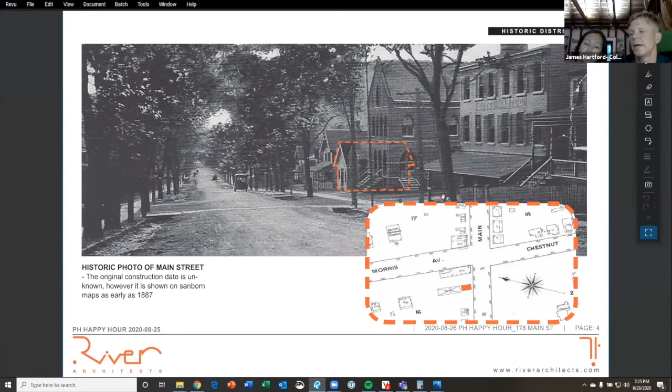So the strategy we had was to kind of classically follow the lines around, making the exterior sheathing layer of the existing building the air tightness layer, over-insulating for that. Then in the basement we'd flip that - the original goal was to retain the original stone walls and then insulate to the inside.

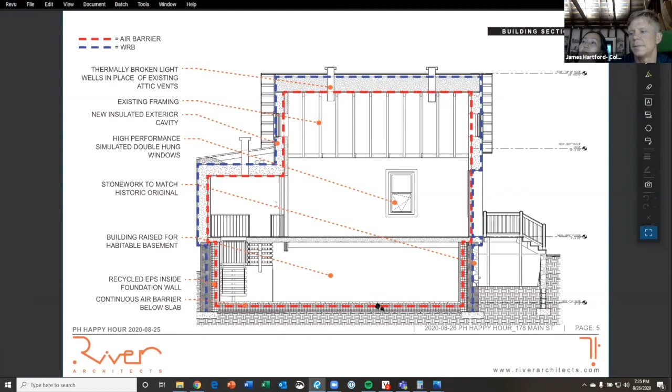So a simple plan - here's the concept that I sketched up one night when I couldn't sleep. The simple idea was to leave the existing stone walls, lift the building up, and extend the stonework up with a thermal break and foam glass so that we can make continuity for thermal and air sealing.

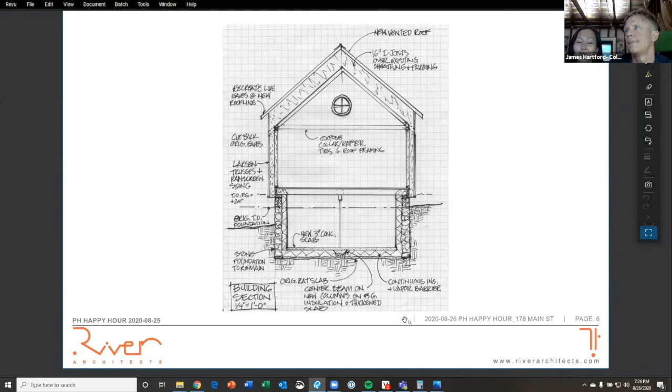In the back of my mind I'm always wondering how that new and old stone wall is going to look, one against another. So here you see the original framing - we chose to expose it for the roof, and the skip sheathing from the old wood cedar shingles that were on it.

Miraculously, this horseshoe shop did not burn down. It just had a big open hearth in the center with a forge, and then had 2 roof vents, which we actually replaced with light tubes.

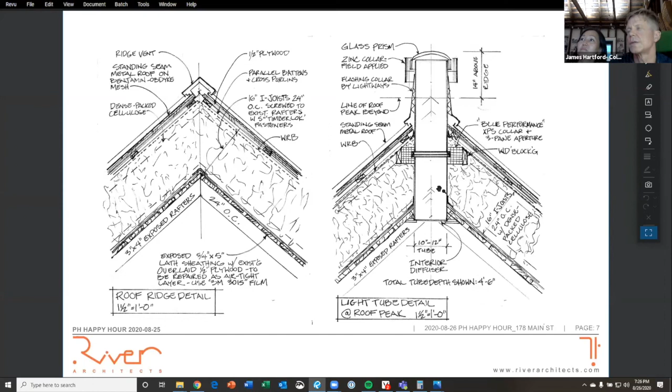So the original sketch is here, trimming off the rafter tails, putting new wall sheathing here, and then wrapping the whole thing with an air tightness layer. Then recreating to the outside those rafter tails and just kind of giving it a puffed up look.

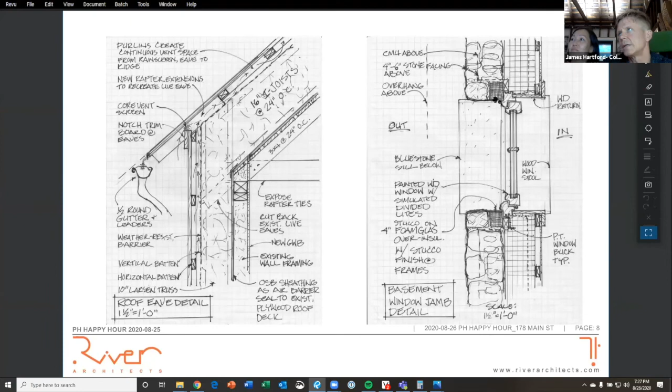We came up with a pretty good window section in the basement plan detail, where we introduced foam glass around the perimeter, so that we were able to get over insulation on the frame, and then did a little stucco wash to make it blend into the stonework. So here it is, extending up the stonework, nice and easy, same idea with the foam glass wrapping all the way around.

But then we realized that the stone foundations had to go. So we stuck with the same plan, but moved the framing out, because the goal was to support the original structure. We moved the plane of the masonry out, bringing the stonework out so that it reduced the amount of overhang there. We created a shelf in the masonry to reclad with reclaimed stone from the original foundation, which is the glacial till throughout the Hudson Valley here.

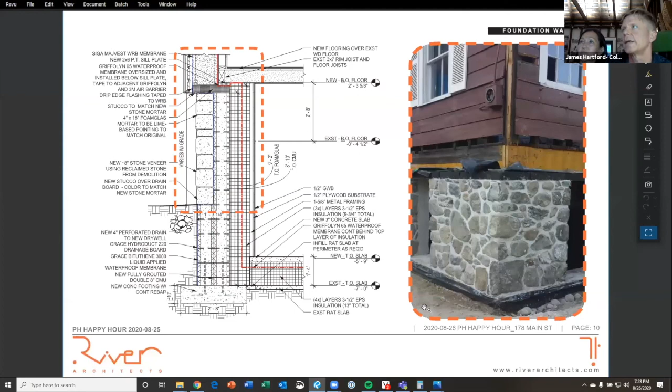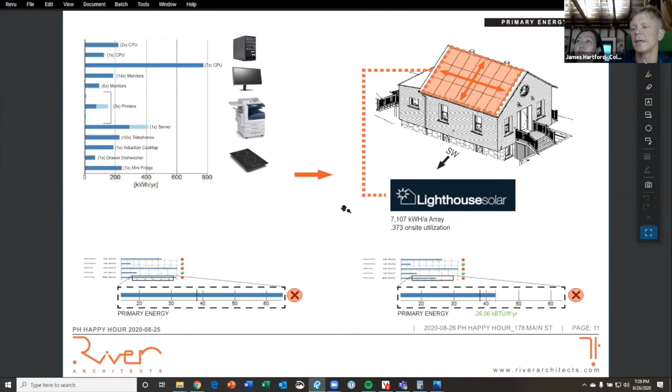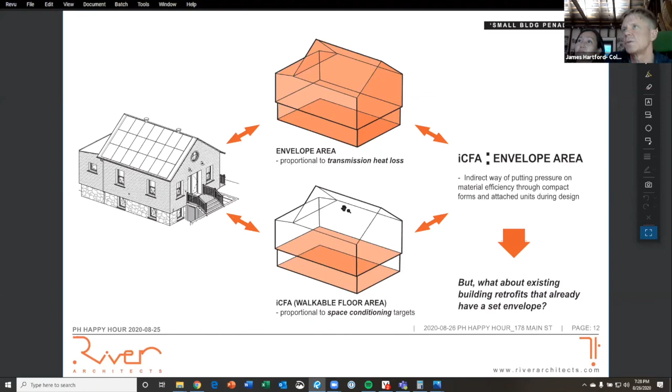So solar - the typical energy loads for an office, even with PV, we weren't able to meet our primary energy demands. It has a lot to do with the small building penalty, which if we added just 300 square feet of loft space, we would have actually been passing.

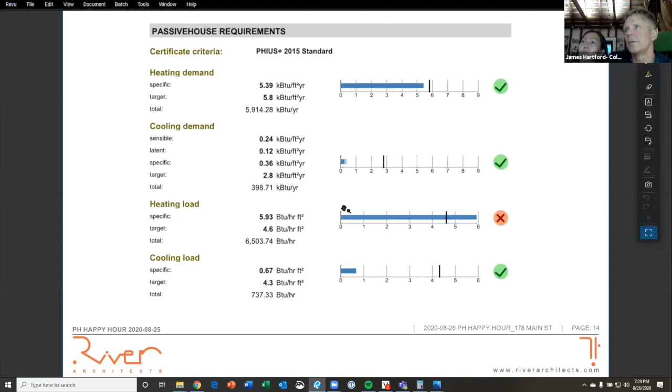We found that the heating loads and cooling loads are actually not very accurate as modeled. We have no problem heating the building. We do require more cooling than the model suggests.

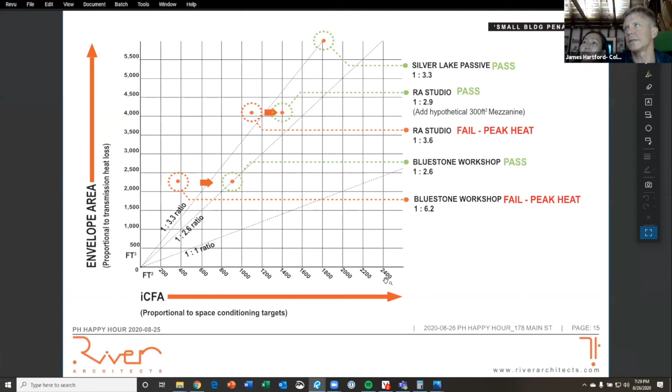And if we were to shift the building, you can see here, if we just added a little bit of square footage, we would be passing. This is just a study of various projects we've done, floor area ratios.

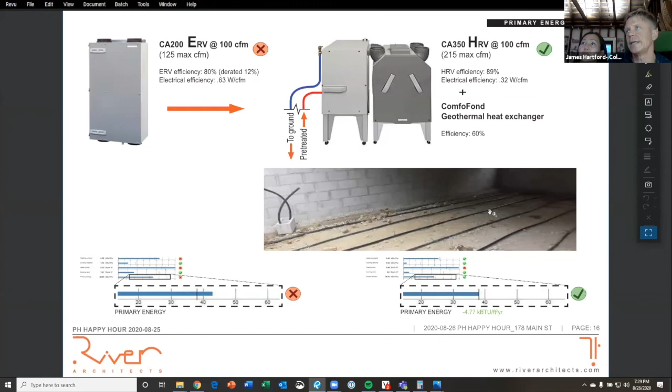Back to the energy modeling, once we added a preconditioning loop in the ComfoFond for the Zehnder, we actually brought it into passing. We basically have ground temperature water in contact with the soil under the insulation of the basement floor, and that gives us all the tempering we need to make our primary energy pass.

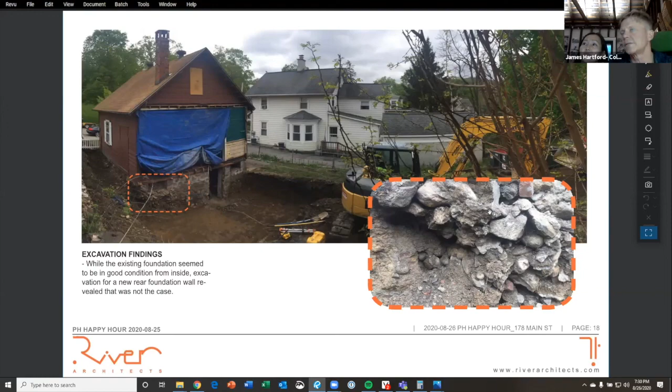And as we dug further, we discovered gasoline from the gas station, so we had subsoil contamination. So we braced the building. Originally, we had a moving company lift the building, and since it was already up in the air, we decided to have them skid it into the backyard.

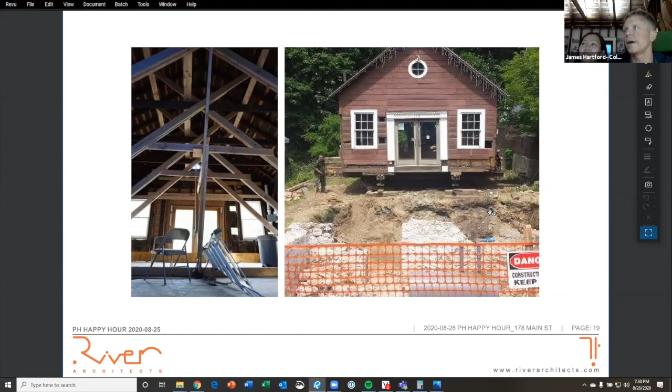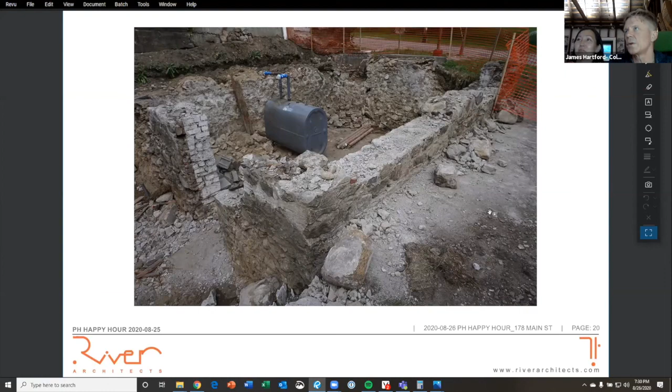And there's our fantastic foundation. And we had that tank, we removed that. But once we removed all this rubble, we were able to gain back quite a lot of space on the interior.

Taking a pause, we were saying the bright side of the thing is, good thing we were already committed to extensive renovation. I said, can you imagine if we were just laymen, just bought the office, renovated the heck out of the interior, and moved in - what would have happened discovering this afterwards and moving out again? We were saying, thank God we found out before.

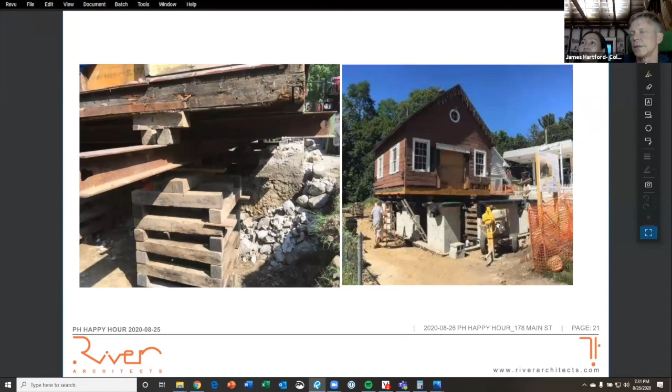Yeah, well, and then particularly about the soil contamination from the gasoline. It was a full dump truck of gasoline contaminated soil from an old leak. So that would have been our interior space that we, if people were just doing a good enough building, they would have been actually capturing more of that fumes inside.

So here we are with the foundations now recreated, and the building being skidded back in. You can see our foam glass and then our vapor barrier kind of flopped over. But the simple plan of just setting the building back down is made much more complex by this system of steel I-beams that we need to pull out, the needle beams. So we had to kind of repair, but we did pretty well.

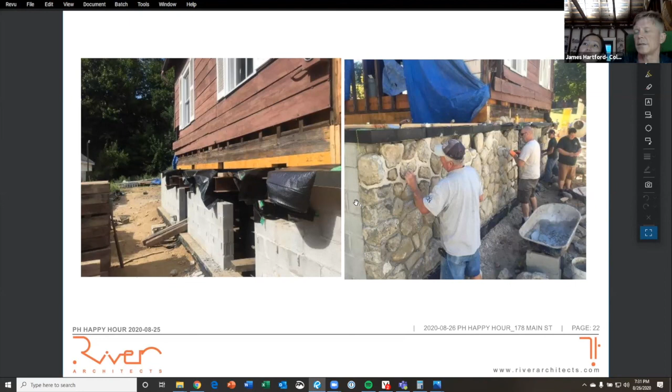So we used reclaimed EPS foam insulation for the basement, and we used the final layer of that buildup to the inside of the vapor barrier to protect the vapor barrier from all the work and the sharp edges of the welded wire.

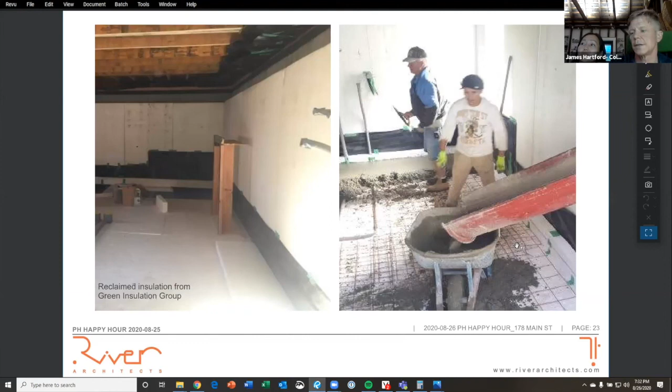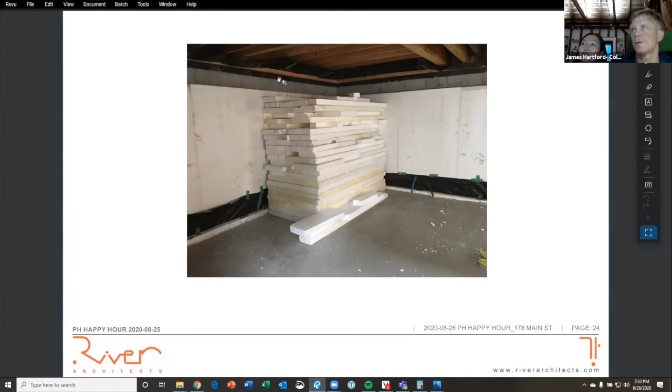And so that's some leftovers from it, but you can see our vapor barrier just waiting to be extended up and then sealed to what's flopped up there above the foam glass. So you can see the foam glass marching all the way around there. And that's our source for green insulation. You can come back to that.

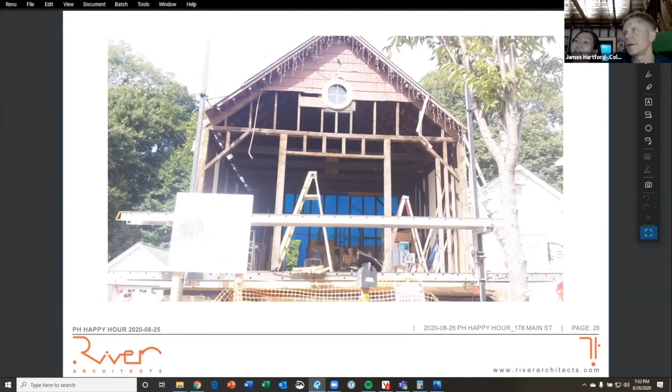And so at the end, we basically came back with a timber frame that we reclad, and so we reskinned the walls. We used the same plywood that was overlaid on top of the original skip sheathing, and then wrapped it with this 3M peel and stick film, which was really great.

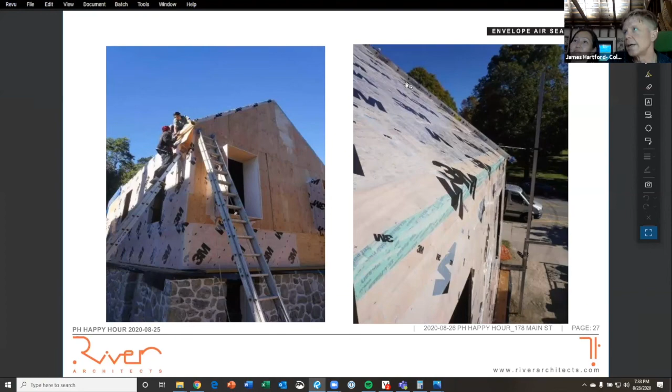Friends have said that we should have built a couple of bleachers across the street so that the neighbors can sit there and watch us, because it was so entertaining for the neighbors.

So then we built up, we have 14-inch Larson trusses on the walls. We made a decision to expose the timber frame on the inside. So what was originally 10-inch Larson trusses, we then boosted up to 14 inches so that we can get all that extra R value outside and meet our energy model.

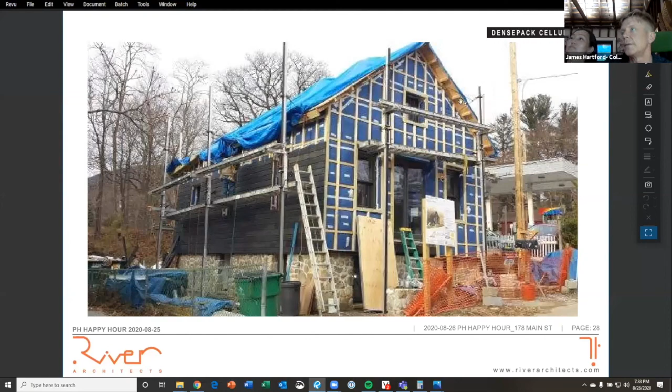We have 16-inch Larson trusses across the roof. And then you can see here where we've recreated in hemlock, which is the original species, the rafter extensions.

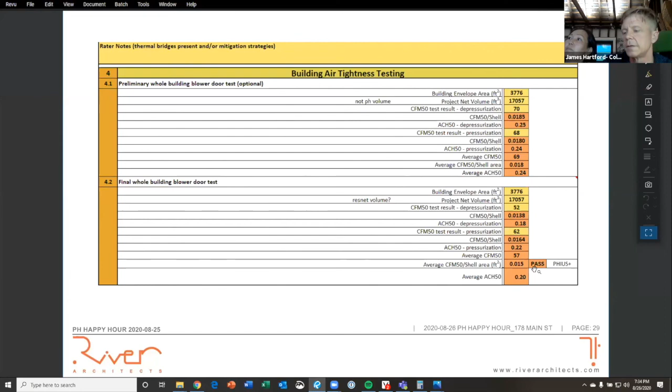And so people are like, you're crazy for all that you've done. But when we sat back and looked at the space that we've created for ourselves, we realized we weren't so crazy. It might have been a labor of love, but we have marmoleum floors, true linoleum floors upstairs.

And the guys who were installing it, it was a bitter cold day, and gave Juhee very strict instructions. Right, and before he came, he said, I need real heat, I need my material to acclimate to the temperature. And he came and I gave him a tiny little space heater to plug in. He got so mad at tiny little me. Quartz ones this big, and he was so mad. He said, I told you I need real heat. And then about noon, he had to unplug and open the doors. He was all sweaty, and he said, I've never seen anything like this.

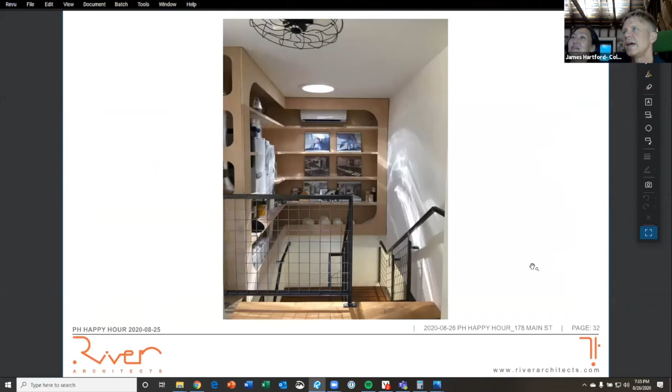This is the new addition, that little shed addition that we tore off. We put our stairwell and mechanical system in it. There's a ledge that was created in the transition at the foundation that we took advantage of and made into a shelf, as well as our whole mechanical system.

So this is our entire mechanical system, and then there's a tiny on-demand hot water heater downstairs in our kitchen broom closet, which we hardly use. Yeah, we turned it off mostly.

So here's a solar tube, and the amount of light that it throws down is just incredible. But then, so this is our system on display.

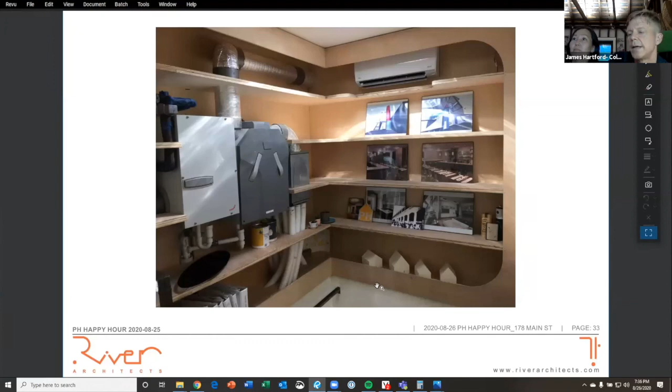A tiny little 9,000 BTU heat pump, and then our ComfoFond here and our Zehnder 350. And we use the larger Zehnder. We could have gone smaller, but ComfoFond is only adaptable to the 350 or the 550. And that's only one unit that we use for both floors.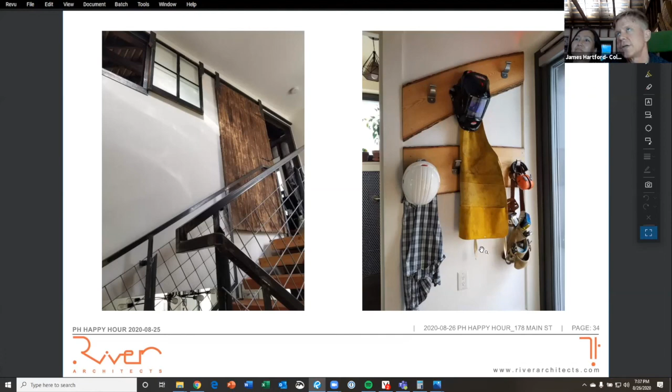If we have two different conversations, we can kind of shut it down and control noise. And some, some kind of our outfit there.

And downstairs is decidedly more modern and clean. Open tread stairs that really bring that natural light down. You can see that, and it's dog friendly.

And so just kind of what's out there. There's some decent federal and state incentives. We were able to pursue a couple of them.

Of course, the solar panel incentives was the easy one. The SBA loan for MWBE businesses, that's what we had pursued. And the paperwork for that was so overwhelming that we couldn't pursue any other incentives.

So after the fact, we learned that there's actually a technical preservation services incentive, tax incentives for restoring historic buildings. We didn't get to capture that, but yeah, we were running blind.

So, lessons learned. You want to go for it? Yeah, well, it was just never assume.

We learned so many things on the fly, and we had to be flexible. Of course, any project has just a dizzying amount of variability, but this was just an insane thing to think, okay, well, what more could we find after the gasoline?

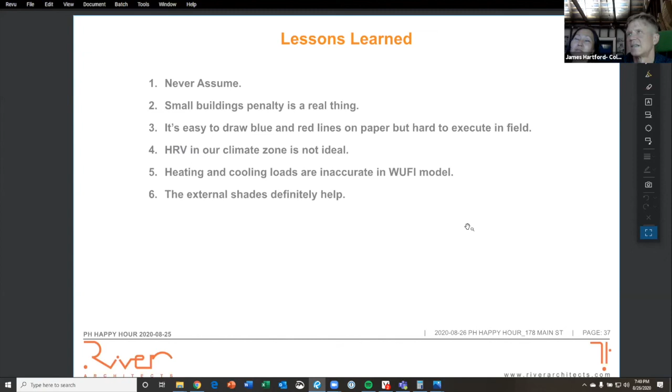And this is not lessons learned, but a couple of things that we've added to our practice to top it off is that we have organic gardens in our backyard. Our contractor friend, who also has a farm, helped us get some organic soil.

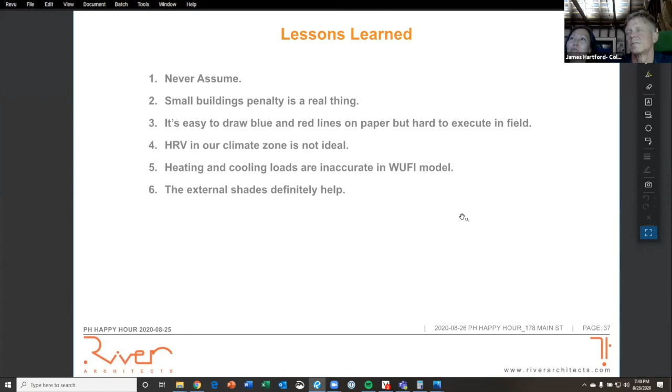We also participated in Green Business Partnership, where they make you go through the hoopla to buy green office products, to have all kinds of green measures. I can't think of it all off the top of my head.

We also bought an electric car recently. So our studio is certified Source Net Zero, and still maintaining that even with the car that we're charging. So it's really great to walk.